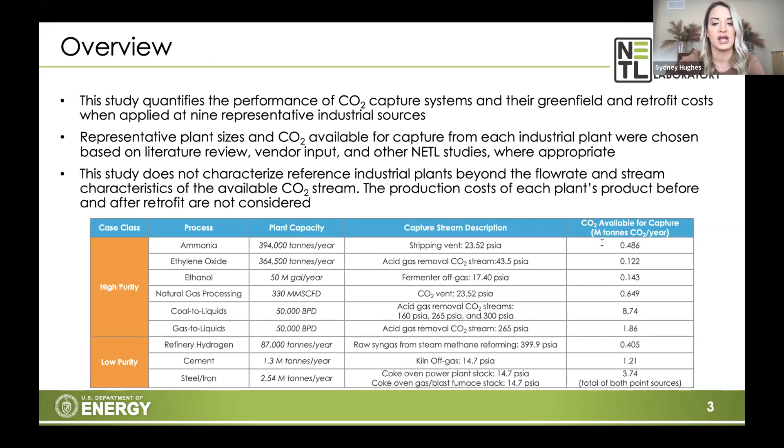We use the emission streams from each of the plants outlined in the table to quantify the cost of capture for each industrial plant. In most cases we provide both greenfield and retrofit capture costs, but for the coal-to-liquids and gas-to-liquids cases we only predicted greenfield capture costs, since there are currently no CTL or GTL plants in the domestic fleet, and we'd expect any new builds in any industry would likely include carbon capture systems. For the iron and steel case, we considered a basic oxygen furnace steel plant, which is common in the domestic fleet now but no longer being built, so for that case we only included retrofit costs in the study.

Some of the most pertinent design assumptions made in the study were related to the capture equipment and its associated capital costs. For cases where we projected retrofit costs, we applied a retrofit factor to our total plant costs, formulated from greenfield estimates of the capture and auxiliary equipment. The retrofit factor reflects the difficulty of implementing capture equipment based on factors such as space constraints and tie-in coordination. For the high purity cases, we applied a 1% escalation to the greenfield costs to represent retrofit costs, and for the low purity cases, we applied a 5% premium.

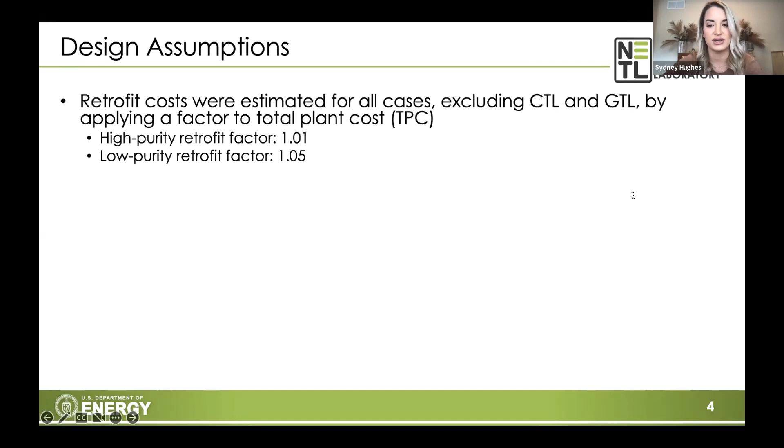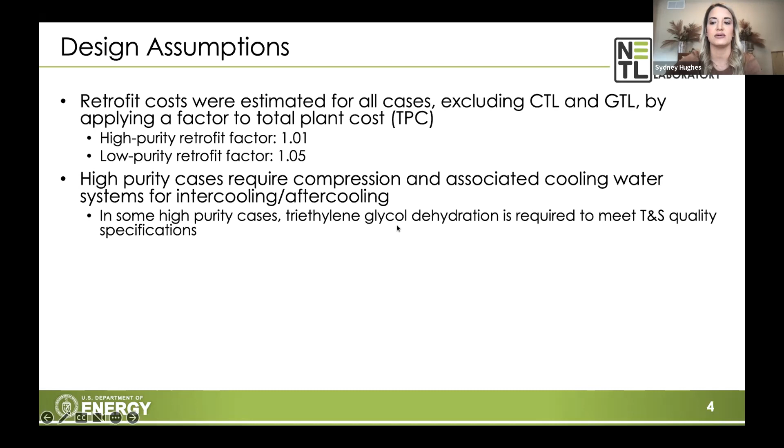We delineated between high and low purity CO2 sources by their purification requirements. In some cases, only compression and associated cooling, along with possibly a little dehydration of the CO2 stream, was required. For cases that required further purification, we called those the low purity cases in this study. We applied amine-based CO2 capture systems to those emission streams prior to the compression and dehydration steps.

The low purity group in this study includes the cement and iron and steel cases, which use Shell's CANSOLV post-combustion capture system, and the refinery hydrogen case, which employs a Shell ADIP ULTRA pre-combustion capture system. In 2021, Shell provided quotes for these capture systems, each at 90 and 99% capture rates. Each quote included capture-rate-specific design so that equipment sizing and solvent performance could be applied appropriately to represent the cost implications of increasing capture rates.

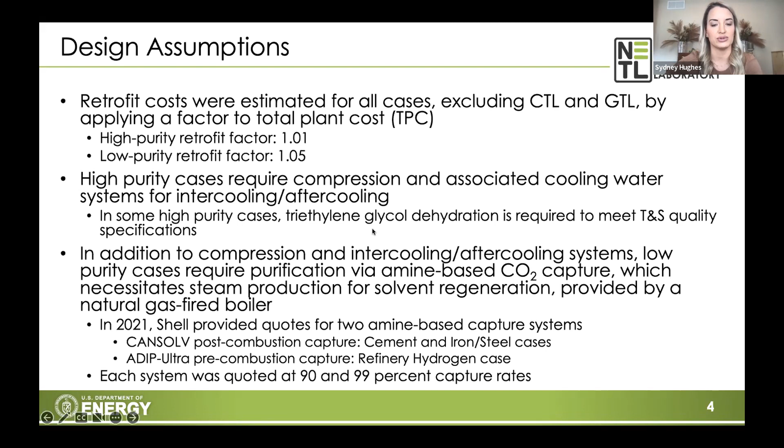As for our financial methodology, NETL maintains a library of quality guidelines for performing studies and TEAs related to energy systems. The methodologies outlined in those QGESS documents were used to guide the performance and cost modeling for the cases in this report. For major equipment pieces such as the natural gas-fired boiler, the compressors, and the Shell capture systems, vendor quotes were obtained and scaled to fit the operating basis for each case.

In two cases, we had small equipment pieces, just a small heat exchanger or a water knockout drum. Those equipment pieces were sized and their costs were estimated based on heuristic equations, as they represented a fairly unimpactful capital cost for their respective cases.

All of the cases in the report include balance of plant equipment to support the capture systems, such as the cooling water tower and water circulating system, accessory electrical equipment to convert grid power to its appropriate users, instrumentation and control systems, and costs associated with site preparation and operations buildings. All of those ancillary costs were scaled from NETL's Eliminating the Derate of Carbon Capture Retrofits, a study where the scale of similar cost accounts in retrofit or add-on applications aligns with the scale of those in this report.

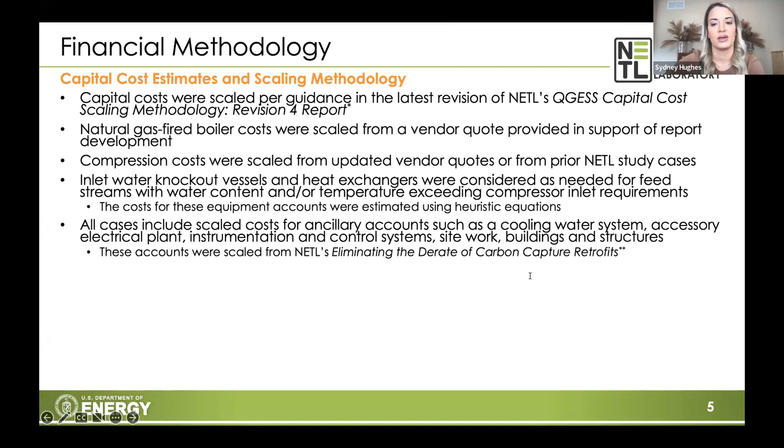Lastly, we included incremental operating labor for each case to account for the additional staff requirement for adding these capture systems at the plants. In the high purity cases, where we only have compression and dehydration, we consider one additional operator. For the more complex purification and compression systems, like those in the low purity cases, we have 2.3 operators added to the plant staff. This incremental staffing requirement stems from the difference in labor forces between capture and non-capture cases in our fossil energy baseline series.

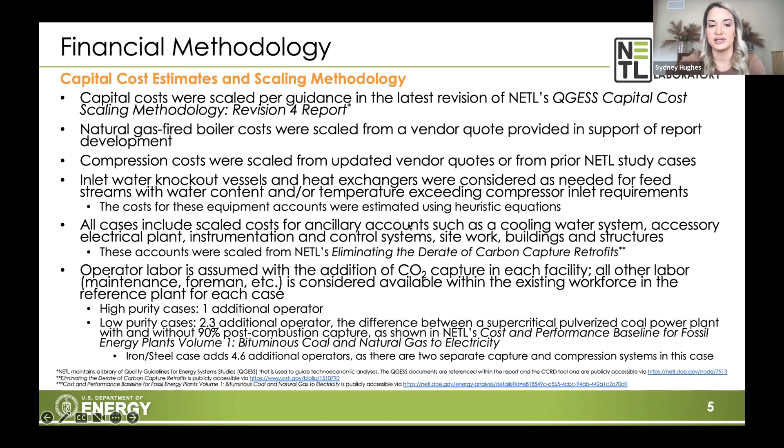I just wanted to note that for the iron and steel case, it was a bit more complex, where we needed two capture systems due to the assumption that the emission streams are too great a distance apart to be aggregated into one capture system. So for the iron and steel case, we have 4.6 additional operators, 2.3 per capture system.

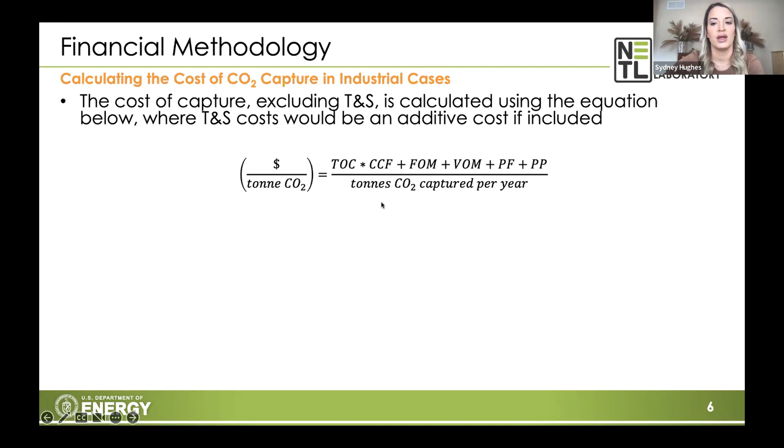The resulting process models we developed were used to estimate the cost of CO2 capture, calculated by the equation shown here. The model outputs helped us generate the capital and fixed O&M costs and estimate the variable O&M costs for consumables. We also used the predicted auxiliary power loads of the capture system and the natural gas consumption rate of the boiler, required to raise steam for solvent regeneration, to estimate the purchased power and fuel costs respectively. Power costs were estimated at a rate of $60 per megawatt hour, and natural gas fuel costs were estimated at $4.42 per MMBTU.

Fluctuations in purchase electricity and fuel prices were evaluated via sensitivity analyses, which I plan to cover in an upcoming slide.

Capital charge factor was used in the equation from the previous slide to bring the total overnight cost of the system to a levelized capital expenditure. NETL developed industry-specific financial scenarios to apply to each case in the study, and the financial parameters and resulting capital charge factors are summarized in this table.

Each case considers a 30-year operational period, but various construction periods are considered for capital expenditure. For instance, the high purity sources require a 1-year construction period, as there's very little equipment and expected to be pretty low complexity when building. For the low purity sources, those that include the Shell solvent-based capture systems, we allotted more time for construction, so the capital expenditure is distributed over 3 years.

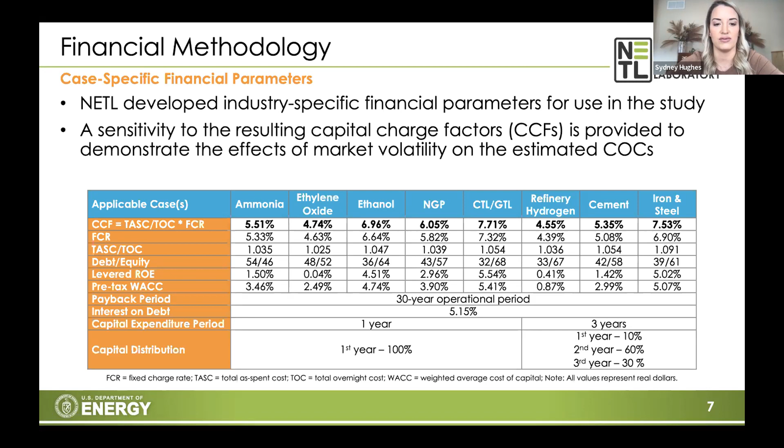The reason for stark differences between the cost of capture, say comparing ethanol and ammonia, is related to the quantity of CO2 captured. Since the cost of capture is represented as a normalized figure down to the dollars per ton CO2 basis, and the individual cost components don't increase linearly, the point sources with higher CO2 flow rates are inevitably cheaper to decarbonize on a per ton basis.

The same phenomenon is noticeable whenever you compare the low purity cases at 99% capture to those at 90% capture. And on that note, we recognize that the notion of lower costs at higher capture rates may be somewhat counterintuitive.

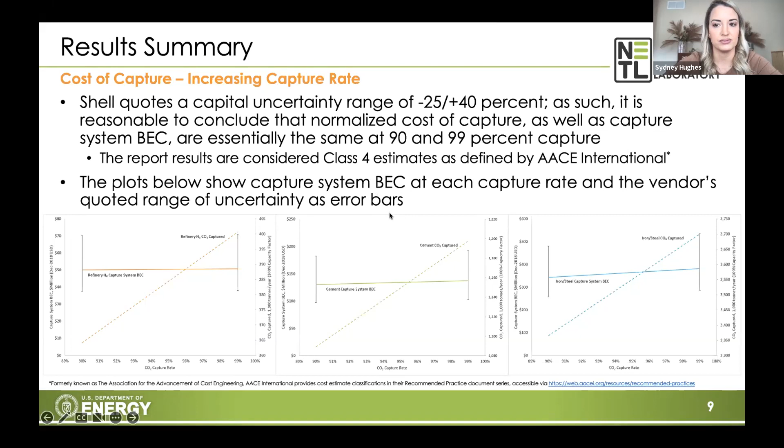Acknowledging the potential variation in design assumptions, we included in the study several sensitivity analyses related to select parameters. Here, I wanted to highlight two that are often a hot topic of conversation, especially in more recent times, and that's the purchase power and natural gas prices that we used.

All of the cases in the study meet auxiliary load demands via purchased electricity. And in the low purity cases where steam is required for solvent regeneration, we use natural gas to fuel a boiler. So the cost impacts from changes to the prices of those two consumables is provided via sensitivity in the study.

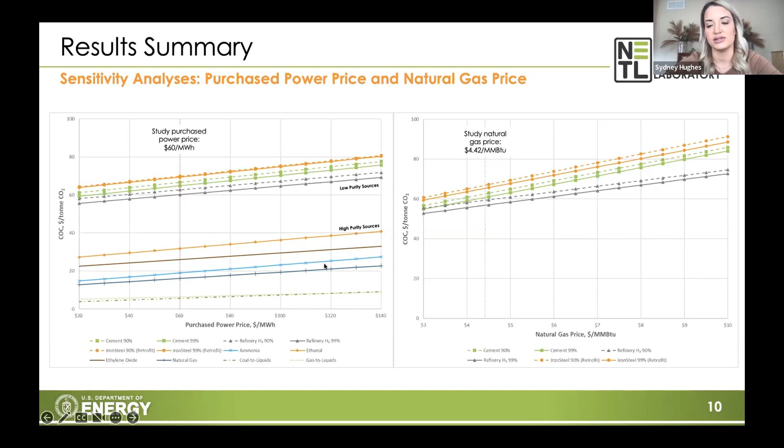But of course, in some applications of carbon capture, alternate heating and power supply options may be available or may be considered for install. For instance, combined heat and power production is not considered in our study, but might serve as a more valuable option for project heating and power supply depending on the scenarios at the host plant.

The results of the industrial capture analysis highlight that while some industrial facilities may be cheaper to decarbonize on a per ton basis, the overall impact of those decarbonizations may prove a little less beneficial than those where normalized capture costs are higher. Of course, the costs estimated in the study are representative of a steady state operation of a base plant defined by our own assumptions, not indicative of the cost of capture of every carbon emitter in any given sector.

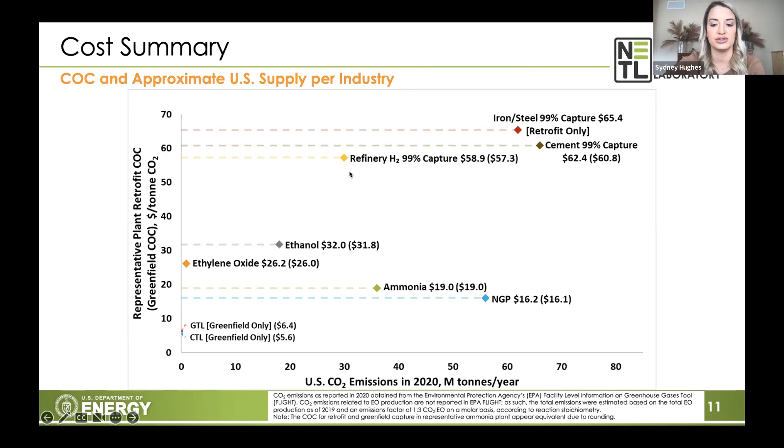However, if you compare the capture costs of one average industrial plant to another, viewing the annual sector emissions for those plants could also provide some valuable insight. For instance, though iron and steel and cement represent the two highest normalized costs in our study, their annual emissions profiles indicate that their impact on industrial decarbonization is greater than that of less expensive sectors like ethanol or ethylene oxide. Cheaper plants like ammonia and natural gas represent possibly easier to capture streams with potentially very large reductions in domestic emissions.

As stated, the costs presented in our report are really representative of a steady state model under specific design assumptions. So like the sensitivities to purchased power and natural gas prices, the report also provides at a high level a sensitivity to the representative plant size and the resulting CO2 emissions available for capture at each plant. Curves like this one are generated for each industrial case in the report, as the representative plants in the study are not indicative of the very many plant sizes we see in each industry.

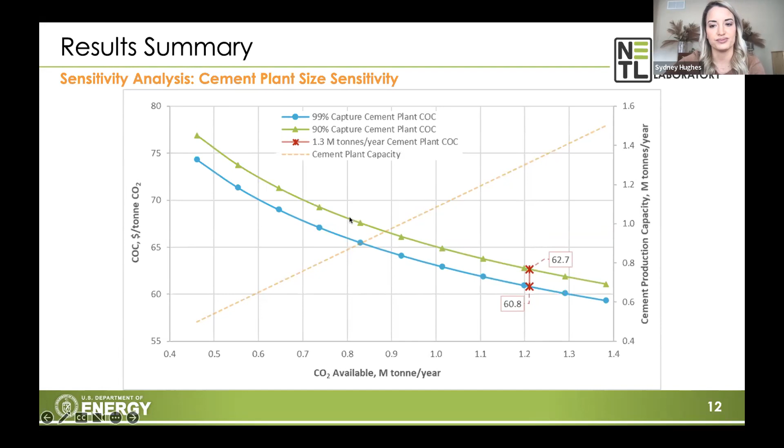That brings us to the very valuable tool developed as a companion to the industrial capture study: the Industrial Carbon Capture Retrofit Database, or as we like to call it, the CCRD. This is a publicly available tool, housed in an Excel workbook, and I promise to show you that in a few minutes. It estimates the cost of capture for a set of industrial facilities, and it can be used to predict capture costs for entire industrial sectors.

It allows for scenario manipulation and comparative analysis based on a set of user input assumptions, and it quickly predicts the cost impacts of varying those assumptions. Users are able to define variables themselves, choose from the default variables, which were sourced from the industrial capture report, or for some parameters, select state level averages.

Some of the cases in the industrial capture report are not included in the CCRD tool. That's simply due to either lack of plant data or emissions data for those industrial plant types, or just a low consensus in the domestic fleet, where it was not really appropriate to apply some of our design assumptions to that list of plants. So, for instance, CTL and GTL plants are obviously not included in the CCRD because they're non-existing. It doesn't make a lot of sense to project retrofit costs for plants that don't currently exist.

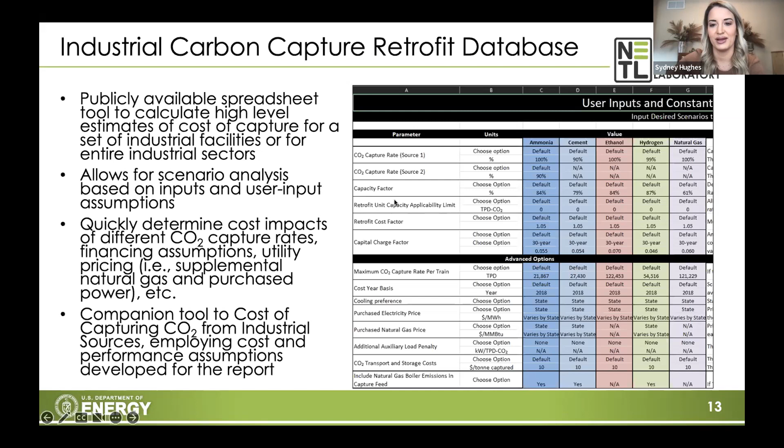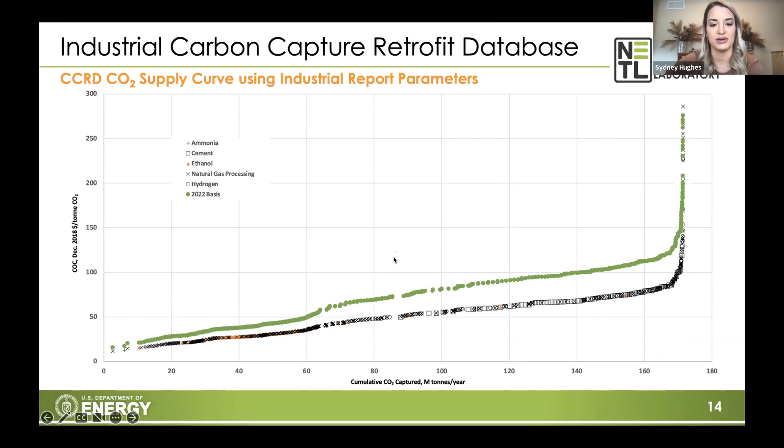The results of the CCRD tool can be used to perform a host of comparative analyses—that's really the backbone of this tool. As shown here, we can use it to predict the additive cost of capture for an entire industry based on our assumptions as a function of cumulative CO2 capture. It's also really helpful in generating quick analyses related to market conditions, like here, where we show in green markers the same analysis as the black and orange markers, but with 2022 conditions, where natural gas soared over $8 per MMBTU, where we were originally assuming $4.42.

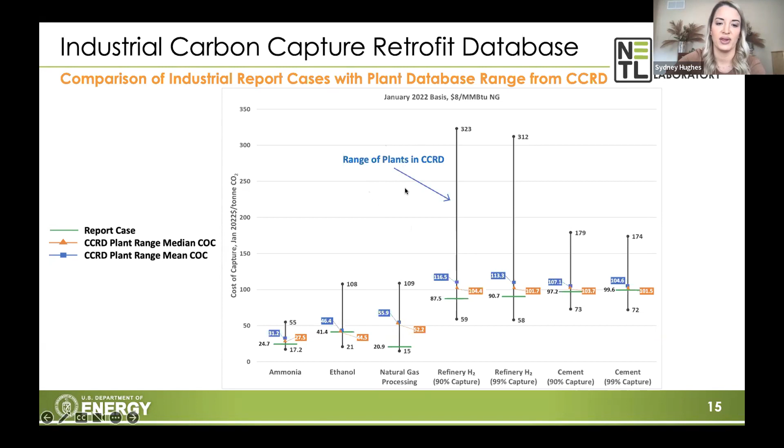The CCRD can also be used to evaluate a range of plant sizes and their associated costs. It can predict their mean and median costs for comparison to other reports or our report. It allows for an apples-to-apples comparison of costs whenever year dollars and financial assumptions are all set to constants. For instance, here we're showing a range of plant sizes along with their reported cost of capture in our report, but all at 2022 conditions instead of our report's December 2018 conditions. So it's really helpful in making these quick comparisons.

And then lastly, just before I jump into a demonstration of the tool, it does allow for a bit better understanding of location-based impacts on capture costs. Several of the parameters can be manipulated to represent state defaults or state averages. This functionality is really important when you're considering capture costs alongside transport and storage infrastructure and the costs associated with T&S.

So the industrial CCRD tool is really handy on so many fronts. It does come with a built-in user guide, so it gives potential users the best experience they can get when running the tool.

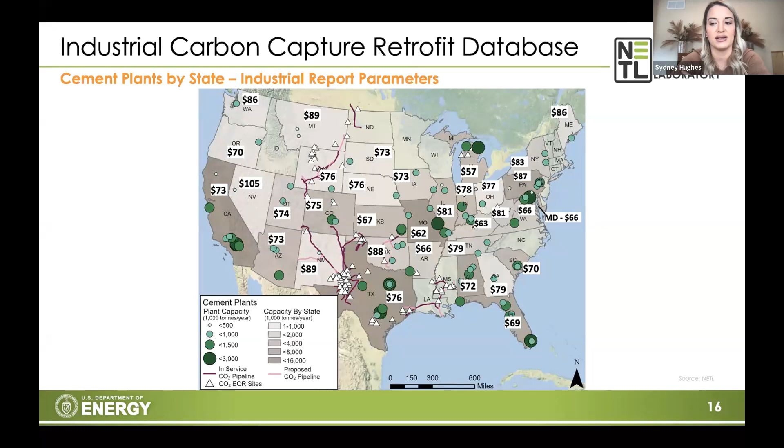With that said, it is important to note that we outline all of our design assumptions to the best extent possible, because the results of the CCRD and the industrial capture report are not really meant to be indicative of actual CO2 capture costs at any industrial plant. The report, as well as the CCRD user guide, serve as tools to demonstrate the capture cost development practices and provide representative capture costs of average plants.

The CCRD tool itself is very valuable for comparative analysis, maybe between various plant operating conditions or financial scenarios, or to compare one industrial sector to another. But overall, the results from each of these should be considered anecdotal. Anything used for project authorization or budgeting decisions would require significant additional study, such as a FEED study, in order to more accurately quantify the capture costs.

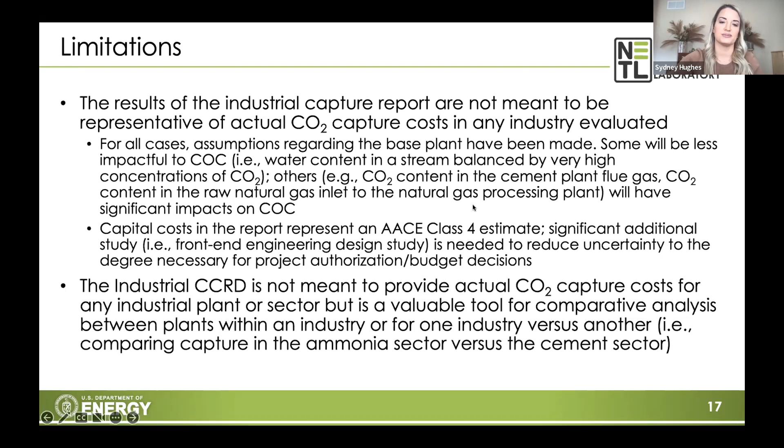So I provided links to the report, the CCRD user guide, and the CCRD tool itself, all for your reference. They're going to be available in the PDF slide deck that USEA provides on their website following the webinar.

So while I'm here, I just want to take a quick few minutes to demonstrate the tool for all of you. Let me share a different part of my screen.

Whenever you open the CCRD tool from the link that I provided, it will open as a downloaded Excel file. The first pop-up you'll see tells you that you have to enable macros for this to work — that's why it's here in bold. And when you click Start Program, it wants to make sure that you've read at least section 2 of the user guide and understand the limitations of the tool, which are largely related to the slide I just presented and talked about.

Following that, whenever you open the tool, it immediately opens to a user input guide where you can select either default values or user input. If you select default, those are pre-populated values. If you select user input, you're able to input what capture rate or capacity factor you want. So several of these variables can be set to user input, state averages, or just the default, which is sourced from the industrial capture report.

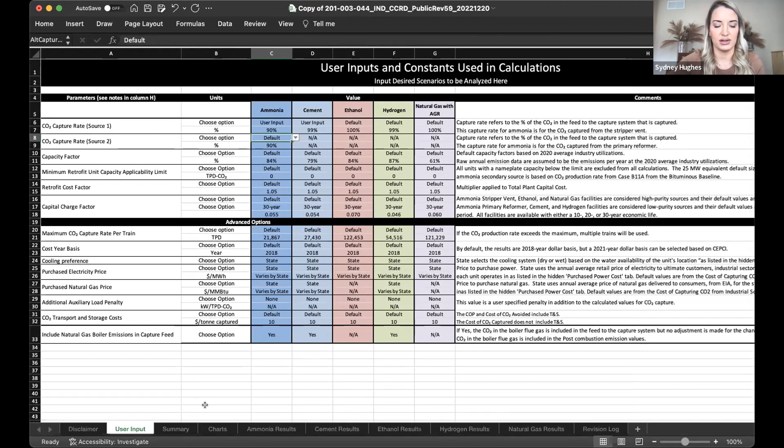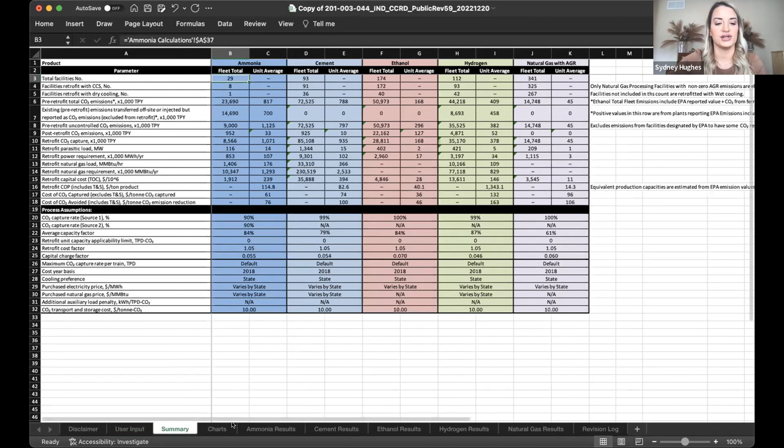The summary tab provides a summary of the results from your analysis, very high level results here. And if you want to see the individual industry results for your specific set of user inputs, there are results tabs for each of the industries down here.

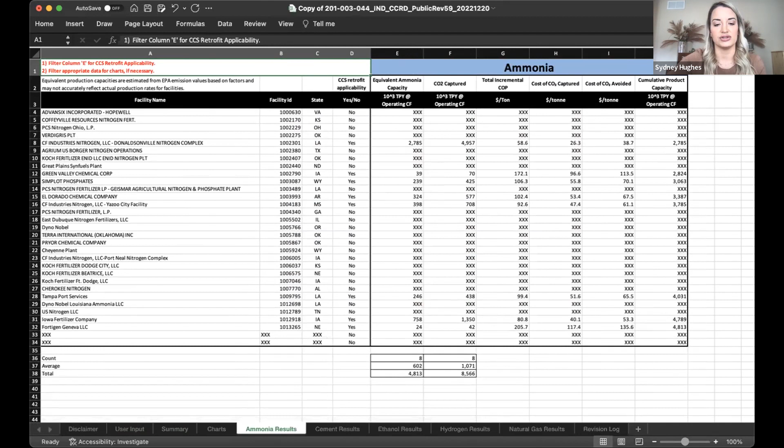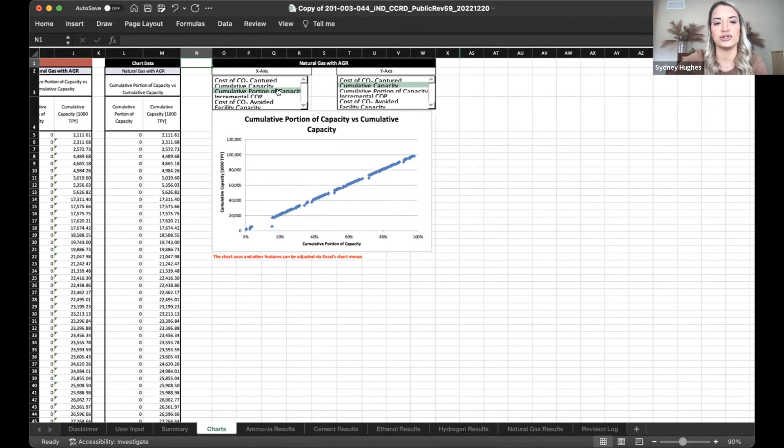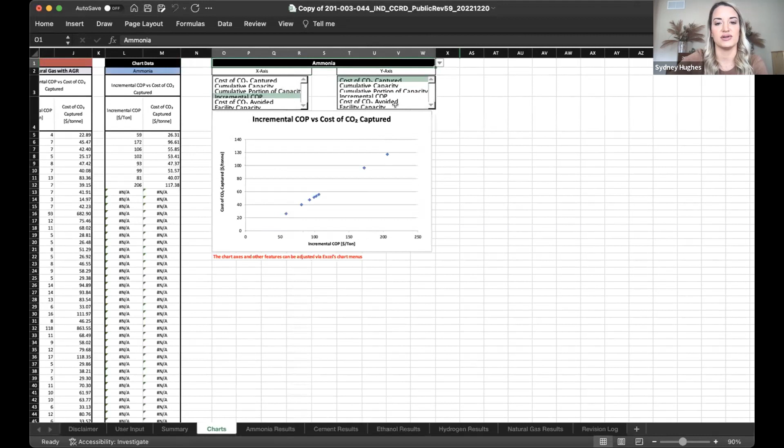Lastly, there is a charts function which can plot several of the pertinent results into charts for you just by selection of what you want on the axis. For instance, we can do cost of CO2 captured and incremental cost of production. And up here at the top, you can select which case you want to see — natural gas versus ammonia versus cement.

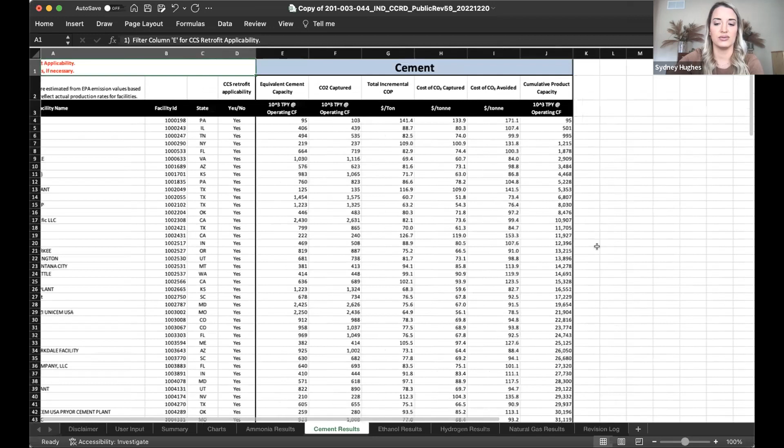Just to show one of the industry specific results tabs, we have the cement results here, where it lists the facility name, location, ID, and some of the high level values that the tool spits out — the CO2 captured, the cost of CO2 capture, the cost of CO2 avoided. So really just a lot that you get to see here in the tool.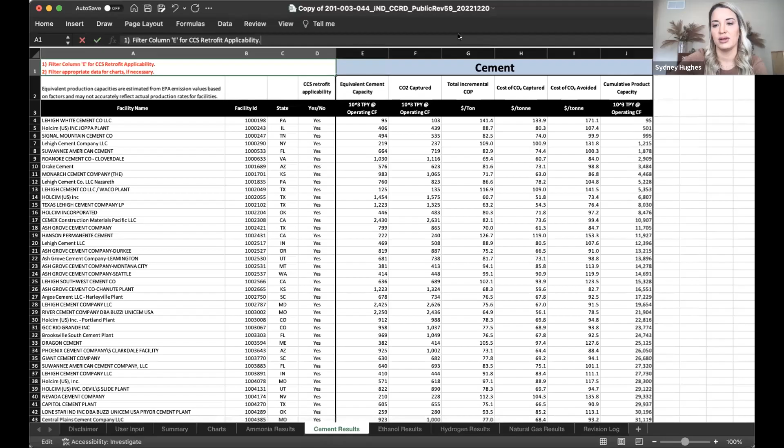And with that, I will flip back to the presentation. That concludes what I had to present today. And I think I've left us 20-25 minutes of time here for questions and answers.

Before I take any questions, I just wanted to say thank you to Tim Fout and Eric Grol at NETL for helping all of us develop this report and this tool.